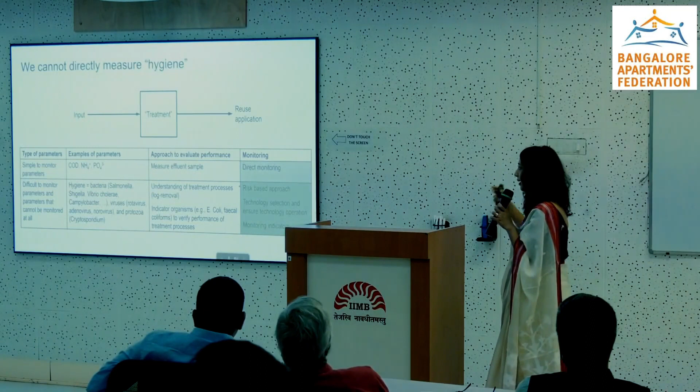However, there is a second system which they use, which is a risk-based approach, which basically says if all the parts of the system are running in harmony and in a particular cadence, then you can actually predict to a high level of accuracy what is the end quality of water. So what they've actually created is a log frame for that. Over here, they really care about pathogens because reuse is mainly hygienic reuse, which is basically for showering. And what they've done is said, if you have an activated sludge process, this is your typical log reduction value.

So now this is for pathogens, but we could very well reframe what are the parameters we really need to be looking for and create a similar framework for Bangalore. Because the biggest issue with sewage treatment plants is that they're not standardized, and standardization is incredibly hard to do because it's much cheaper for builders to cast tanks in concrete while they're building systems rather than buy a plug-and-play model that comes and sits there.

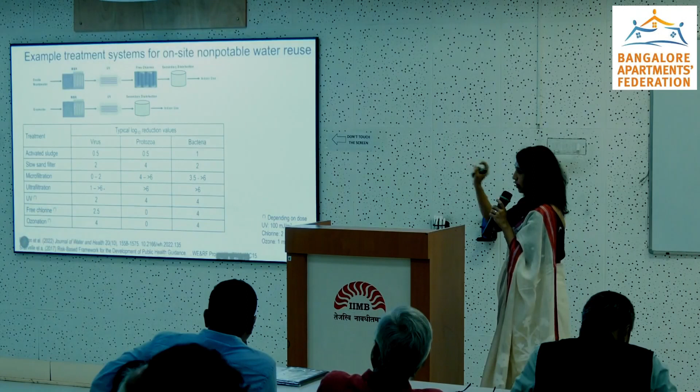And for that reason, maybe 70% of the STP stock has SBR systems. And if you look at each of those SBR systems, no two systems are alike. So it's incredibly hard to consistently assure you're going to get good treatment at the end of it. However, there are some key points that need to be taken into consideration for those systems, and a combination of IoT sensors and machine learning algorithms can actually tell you if those systems are running well.

So what we are really proposing is a framework for monitoring and maybe a service contract model as a prerequisite to sales to ensure that there is quality. Yeah, thank you.

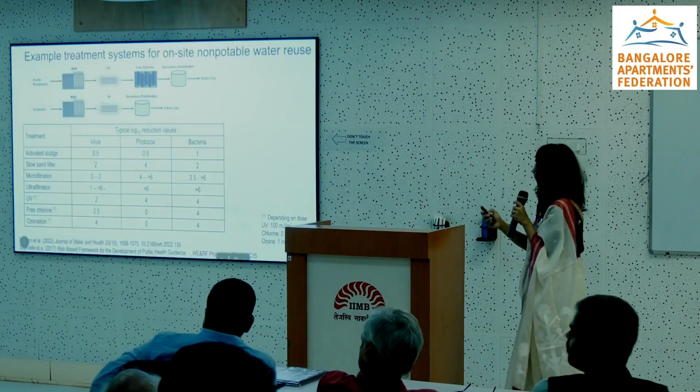Yeah. This one? This one? Yeah.

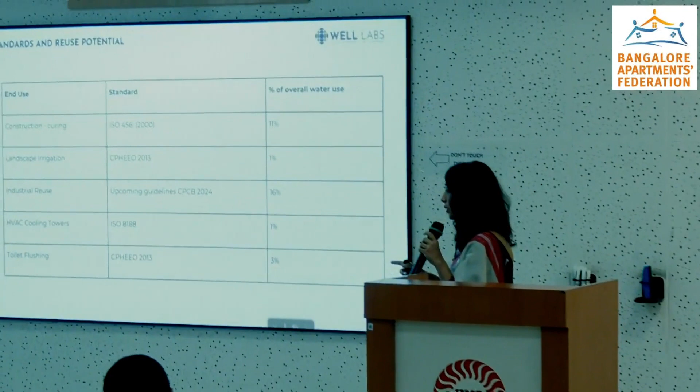So I'll talk about the two end uses that show the most promise. So construction, curing. If you look at it, they're asking for chemical oxygen demand, biological oxygen demand, TSS, pH, sulfates, chlorides. So they're not actually measuring fecal coliforms. And fecal coliforms in wastewater are really important because at the end of the day, you have workers. I practiced as an architect for more than a decade. So if somebody has a cut on their hand, they're in trouble if that water has pathogens in it.

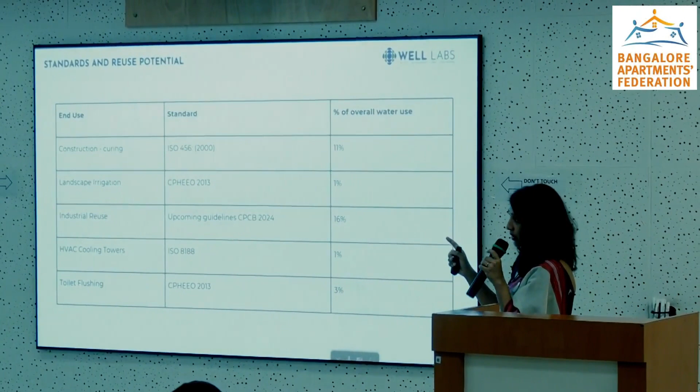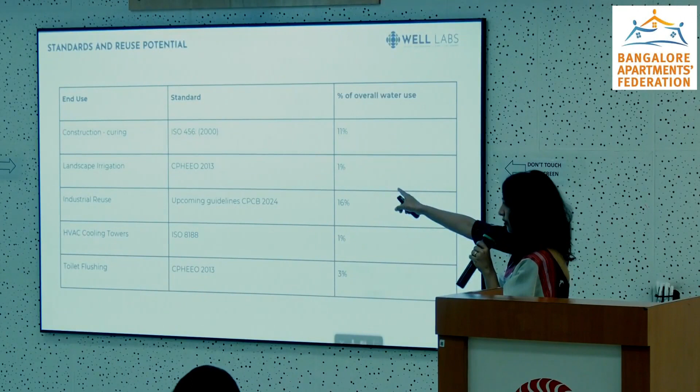So I think that's why we're saying we need a framework in place that ensures pathogens are also removed, because that should be the starting point for any reuse. Because right now there's a loophole. You can measure for this, but you have to make sure the plant is actually meeting the KSPCB standards. And the KSPCB standards are being measured once a month.

Now, it's possible that those standards are actually being met by the plant, and there are a few operators that will take the effort to measure it more consistently, but that framework needs to be formulated and in place now as a guideline. Yeah. Yes.

So the thing is, international ISO standards have been contextualized for construction in the Indian context, because if you actually look at how construction is done around the world, it's very different. So even though it's ISO standards, it has been contextualized for the Indian context. BIS is not the norm that is being followed, however, BIS is now considering putting out standards for wastewater reuse in construction. But the science. Sorry.

So in Bangalore, we have a path dependency. We already have 3,000 sewage treatment plants, and they're already constructed and already run. I think there are two things that we need to look at. One is what is the ideal treatment state? And really there, more than standardization, because that still requires enforcement and somebody going and checking those systems, which is impossible to do, perhaps brands can act as a proxy for that, because nobody comes and checks our RO system sitting in our kitchens. Why can't the STP actually become that way?

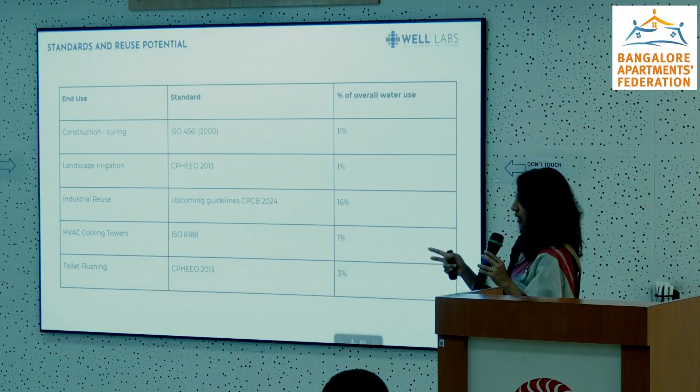But the path dependency that we have is not negligible, right? We have 25% of the city sewage actually being treated in those STPs. So for those systems, we're really looking at what is an innovative model now to ensure quality, and I think operation is actually one of the key things. So we visited plants a couple of times. The plant design is only one component, but operating it is as important. So yeah.

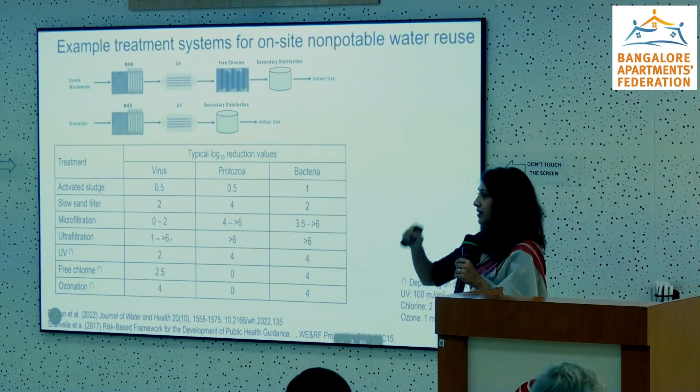But even in an STP, there were consistent water quality tests done for all the parameters every single day for a month, and the amount of variability was very high. So it's not as if you tested once a month and you know that system is working well. And also the opposite is proving to be true, because now there are people who are actually transporting wastewater and they're checking 20 systems and they're saying on this day the system wasn't running well, so they just write it off. And that's a huge missed business opportunity as well, right?

So one option could just be to ensure that the system starts running properly. And it is a very complicated thing to do. There are people who just specialize in STP audits and running systems. But we think that, because this will emerge as a new business model again, to ensure that there's some quality in that as well, trying to use some kind of technology where you can actually see the results consistently would be the right way forward. Yeah.

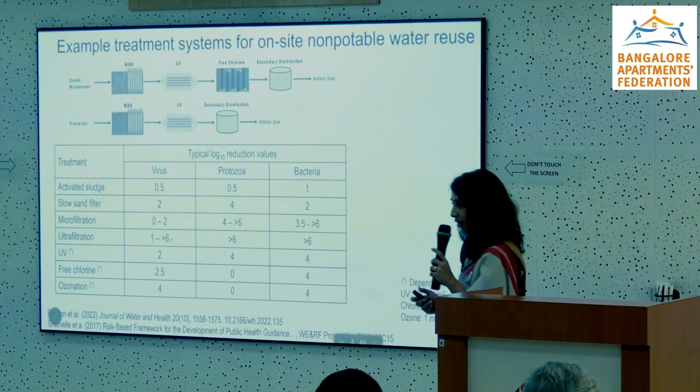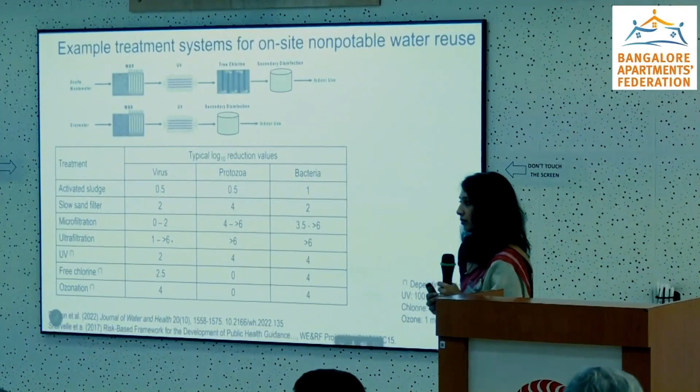Yeah. There are these cheap dip test kits. Actually, maybe Shashank, you want to talk about the dip test? Whatever has less than 20 rupees for a test, or just 20. Yeah, those can be the ones which BAF can take up and put up.

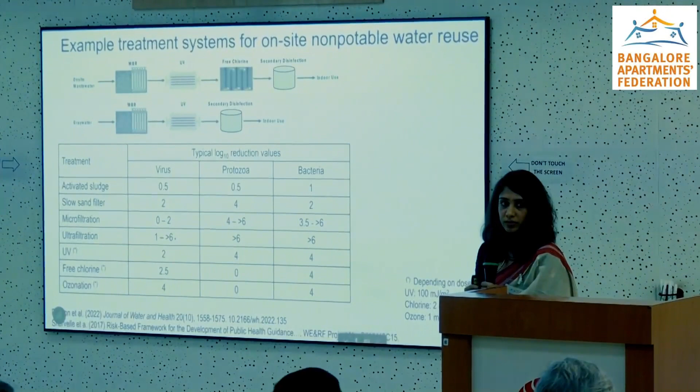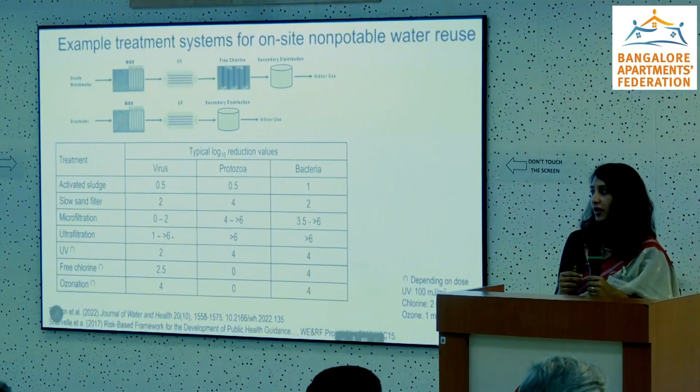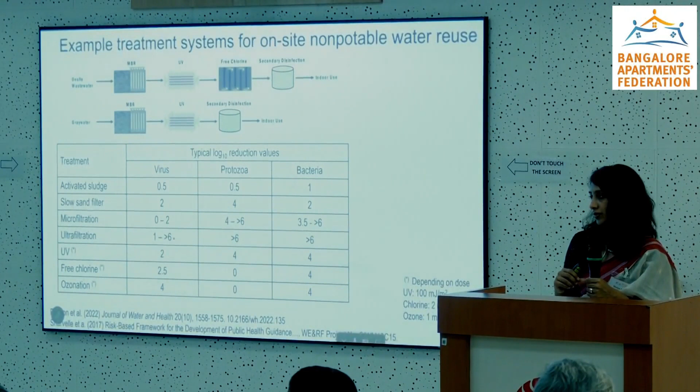I think one of the tasks going forward and as an outcome of this workshop would be to create standard operating procedures and processes on how the quality assessment happens at exchange points. See, as long as people start seeing that this is what is happening, once testing is changed, they push for that change. Yeah. That's one of the ways. I just also wanted to mention that CDD is going to be helping with the creation of this framework through the monitoring and

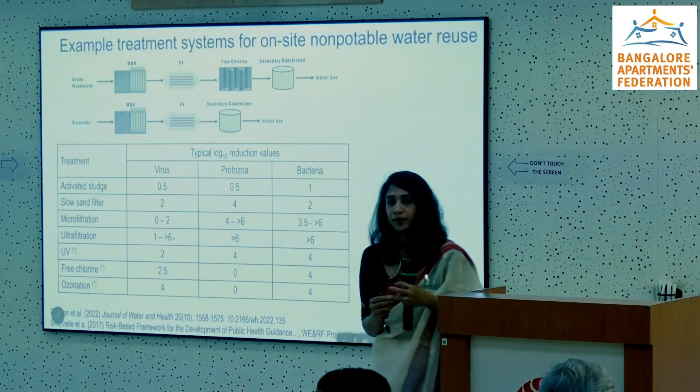From the testing point of view, there are very simple ones called H2S vials. I think Vishwanath sir will definitely say. This is something every primary healthcare center is using. It just requires visual observation. You put water in that vial, leave it for 24 hours. Tomorrow morning you have results. Very simple as such. It is something that we can use.

Like Shashank said, there are definitely tests in terms of quantity and quality also. But I think these are very simple tests that we can easily conduct. Anybody can do it. Even our ASHA karyakartas are doing this for quite a long time now. I think one thing that we really wanted to ensure, the reason we didn't advocate for dip test kits, which was something that we initially were, is how do you make sure people are actually doing it? So that again becomes something which can easily be overlooked. But the incentives are there. Right? Now the economics is there.